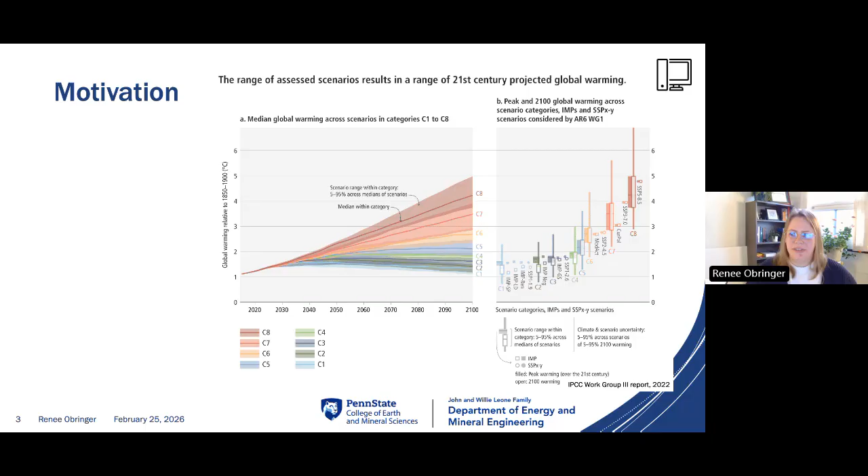This talk focuses on water, specifically water in the West, and some of the implications we've already begun to see from climate change. We're seeing increased droughts, a phenomena that's happened in the Western US for centuries. It is a drier climate, and so they end up with droughts.

But we've also started to see these droughts in places that haven't previously had extreme water issues, such as New York City and New Jersey, even leading to mandated water reductions on the East Coast, which was previously basically unheard of. To the point where after Hurricane Helene a few years ago, every state except two were actually considered to be in drought within the US.

Where I'm from in Pennsylvania, we tend to think of drought as a Western US problem, or somewhere away from where we are, because we generally have wet springs and summers. But that's starting to change, and we're starting to see this idea of demand management popping up in places it hasn't in the past.

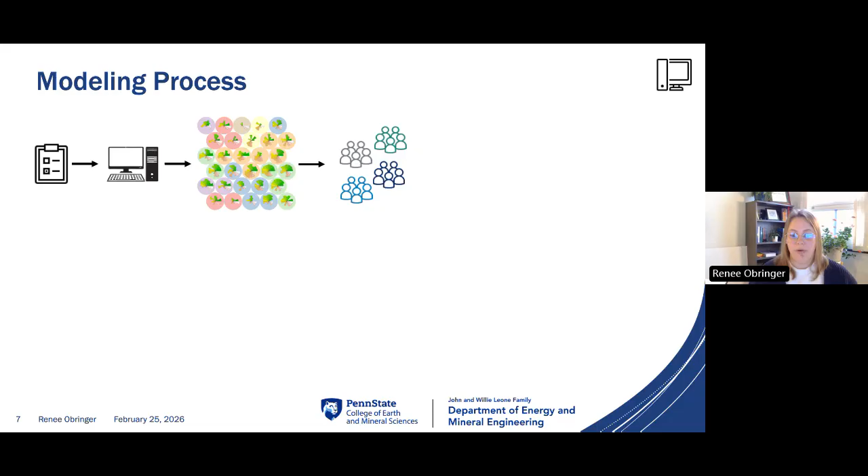We were able to classify those and ultimately ended up with 7 key archetypes of how people in these cities felt about water conservation. This first part was published in Water Resources Management in 2023, and it's the starting point of understanding these attitudes towards conservation.

After that, we took those attitudes and integrated them into the agent-based model. To do that, we collected stream flow data, weather data, and water consumption data from the 3 cities, integrated them into a large agent-based model, which is open access if people are interested. The result of this model is then a prediction of the water storage in the city as a function of these inputs.

Basically just solving the water balance equation: we've got precipitation coming in, we've got stream flow coming in, we've got water use leaving the system, we've got evaporation leaving the system. This initial development was published in 2024 and focused primarily on Phoenix, as just a way to test if we could integrate all of these data sources to adequately model the storage in the region.

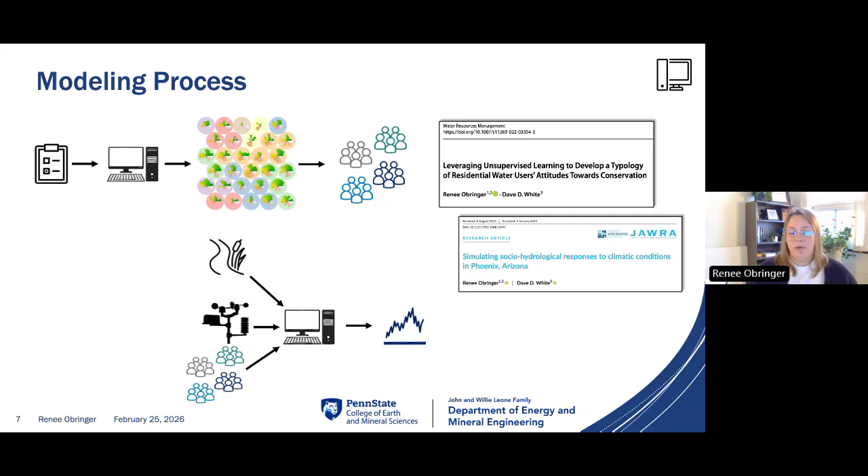What I'm going to talk about most today is the step where we actually integrated demand management and climate change into this model. To do this, we took away the observed water use and put in some hypothetical demand management scenarios based on our archetypes - basically saying, if we develop a more participatory water use model in Phoenix, Las Vegas, or Denver, if more people are participating in conservation programs and aligning themselves with a pro-conservation attitude, does that actually have a long-term effect on the storage?

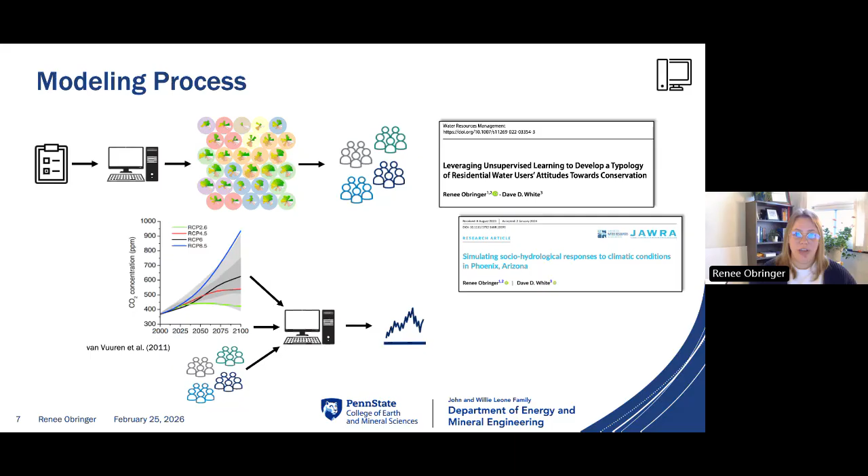We also took away our observations and replaced those with climate change scenarios, specifically using the CMIP5 scenarios, which had the greatest data availability for our region of interest. This most recent paper was published late last year in Water Resources Research.

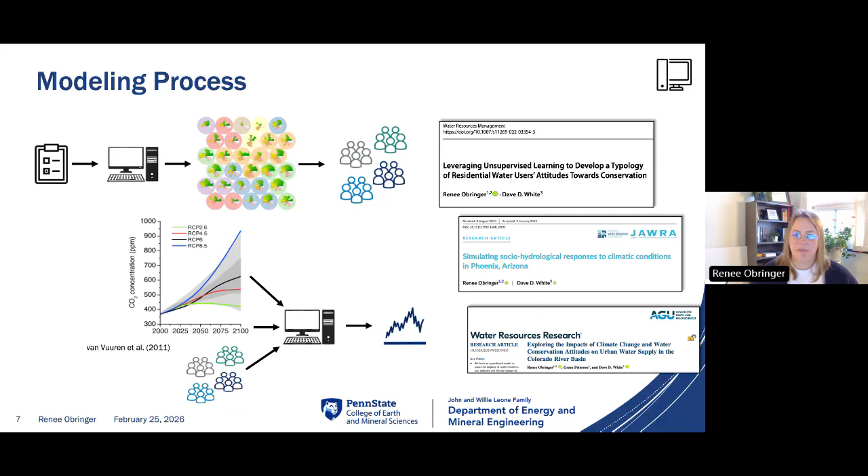Throughout the talk, I'm going to start talking briefly about these attitudes just to provide the background, but mostly I'm going to focus on this later ABM.

To jump into the research questions, the first question that we wanted to answer in that first paper is: what are the archetypes of consumer attitudes towards conservation? Is there a difference between somebody who is actively participating in a conservation program put on by their city versus somebody who doesn't care about water conservation?

Can we tell that there is a difference in how they responded to our survey? So in this case, this is that first half of the modeling process where we took survey data and developed through unsupervised learning to identify archetypes.

The primary input to this part of the study was the survey data conducted in 2018. There were 3,000 surveys sent through mail across the 3 cities with a 28% response rate. If you're familiar with social science work, this is pretty standard. You don't expect a very high response rate since people are busy and not always interested in filling out these surveys.

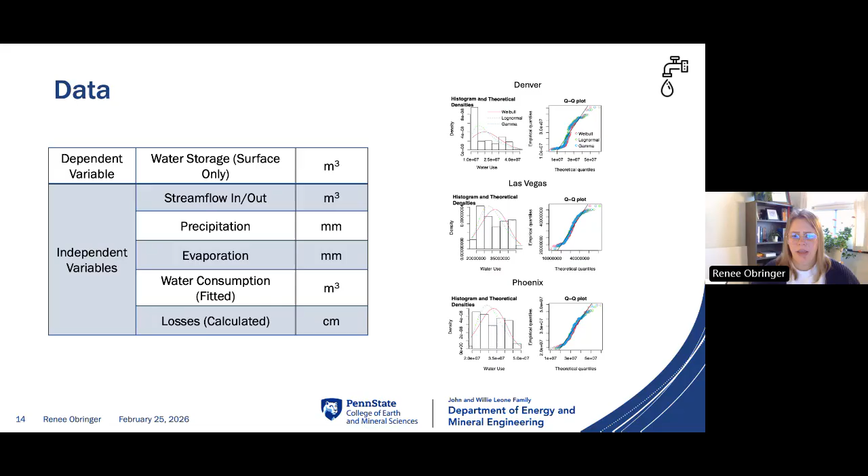And so here, our research goal was then to develop that ABM. And as a reminder of what our methods looked like, we took our stream flow in and out, our hydrological conditions.

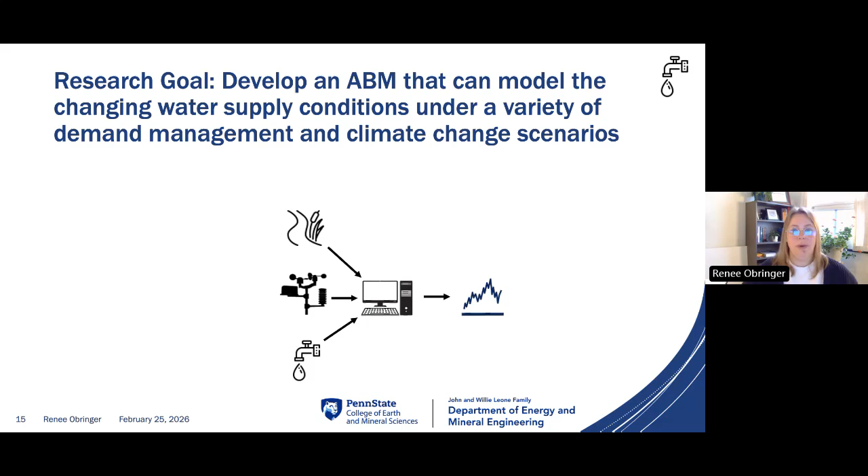our meteorological conditions in the region, and our fitted water consumption, built an ABM, got a prediction of the storage by solving that water balance, and then replaced it with demand management scenarios, primarily focused on changing those attitude archetypes, and also with climate change.

And again, in this case, we focused on an ensemble of 4 GCMs, but also did all 4 RCPs in the CMIP-5 iteration of the general circulation models. So we've got very low warming, very high warming, and the stuff in the middle.

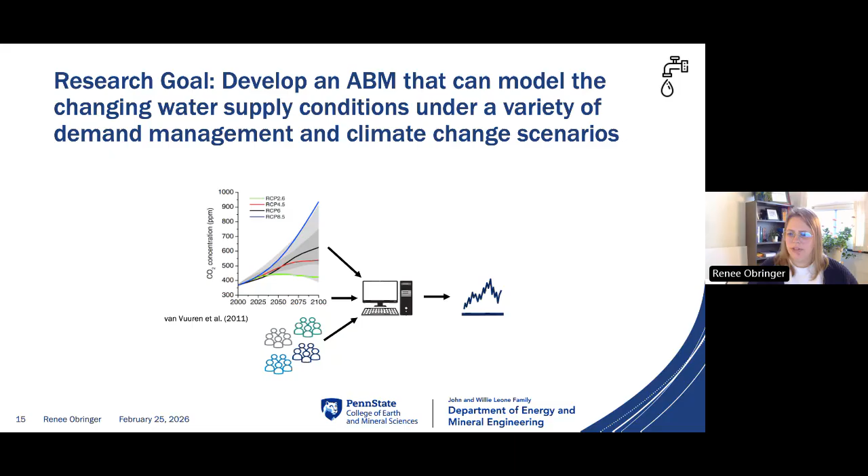And so to jump into the results, we have our observed baseline. When we started this model, we had all the observations, and we wanted to see how well the model actually fit the real data.

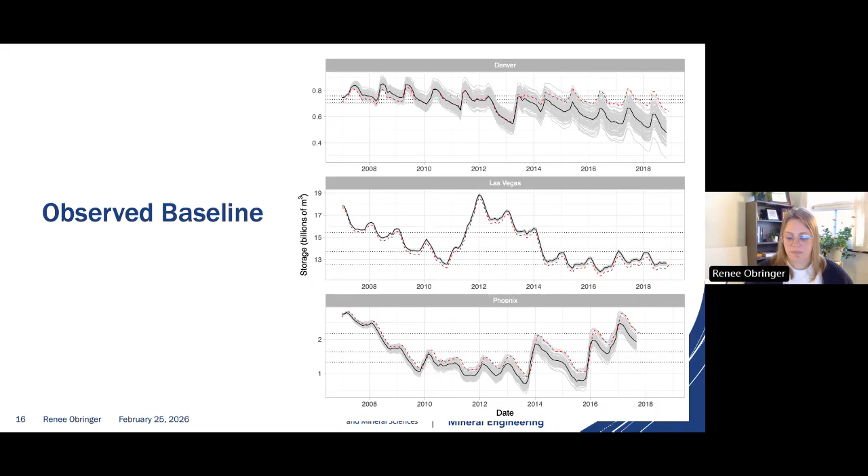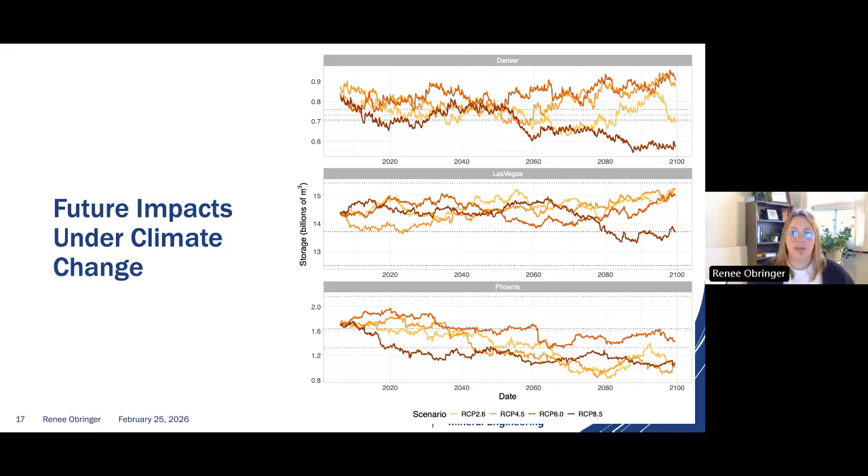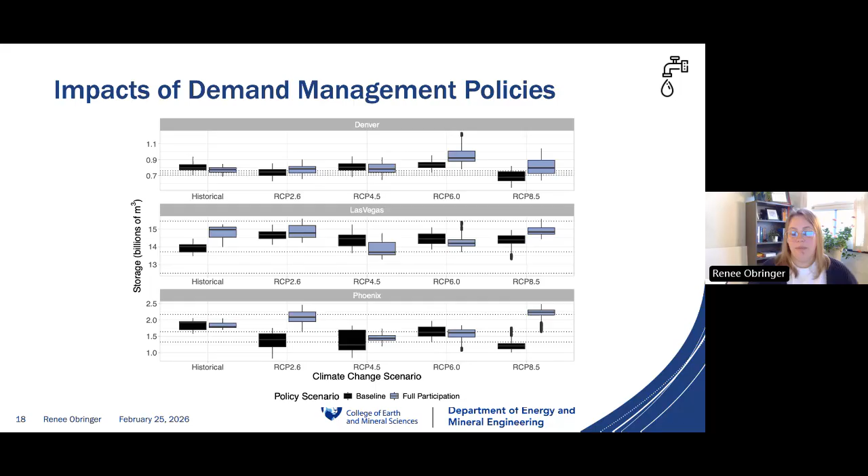In the lower basin, adding more participation is good and helps maintain some stability in water availability compared to the baseline, but it might not be a catch-all improvement. They might need to think about more creative solutions to manage the difficulty of climate change reducing water availability, when demand management alone isn't enough to keep up.

So to summarize, we found with our first paper that promoting these conservation attitudes can lead to improved water availability, but under extreme or even moderate climate change, these reductions are not always enough. Even though it is good to reduce our demand, we can't solely rely on that to solve the water availability problems that we have.

Certain climate realizations through our climate modeling can lead to reductions in surface water availability that can potentially outpace the improvements from reducing demand. So we might still end up in a situation where we're consistently in a water shortage, even though we've tried to reduce demand as much as we can.

So some practical implications, especially for the Colorado River, which is currently undergoing a renegotiation of the allocations for all the states and countries—Mexico is also involved in that discussion about who gets allocated how much water. It's a very complex legal situation, but one practical implication we can think about as we go through these discussions is that demand reduction is still important.

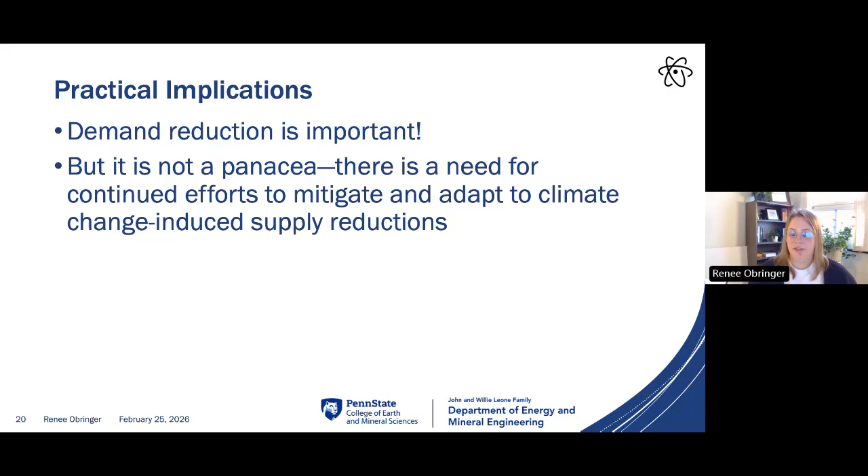There's still a need for continued efforts to not only mitigate climate change and reduce those potential impacts, but also adapt to these climate-induced supply reductions—either through increased water reuse or improved interstate and inter-country relations—to try to ensure that water is passing all the way through the river and that everybody has access to enough for a sustainable future.

It's also important to remember that not all climate change realizations will have the same impact. We had four models, and for each we took the ensemble, but each of those iterations makes a different projection based on its internal assumptions. So making sure we recognize that some climate models may have a fairer outlook than others, but acknowledging that these are, at their core, still projections, and that we need to acknowledge the uncertainty in those as well.

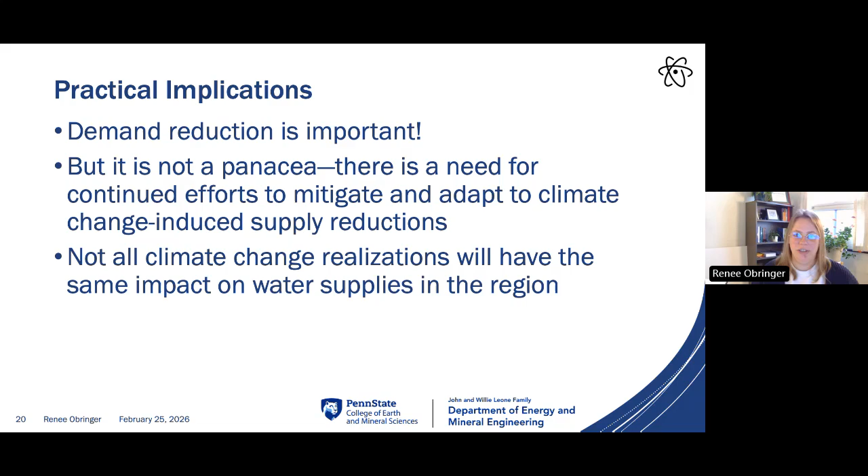Finally, cross-boundary coordination is really critical for maintaining the supply. Denver has the potential to see significant improvements due to demand management. But if they enact this, they also need to work with the cities and utilities in the lower basin to make sure Denver isn't just pulling their full allocation and saving it for later at the expense of Las Vegas, Phoenix, and Mexico down the line. So really encouraging cross-boundary coordination, in acknowledgement that some cities might win while others might lose, and we can work together to make sure everybody has enough water.

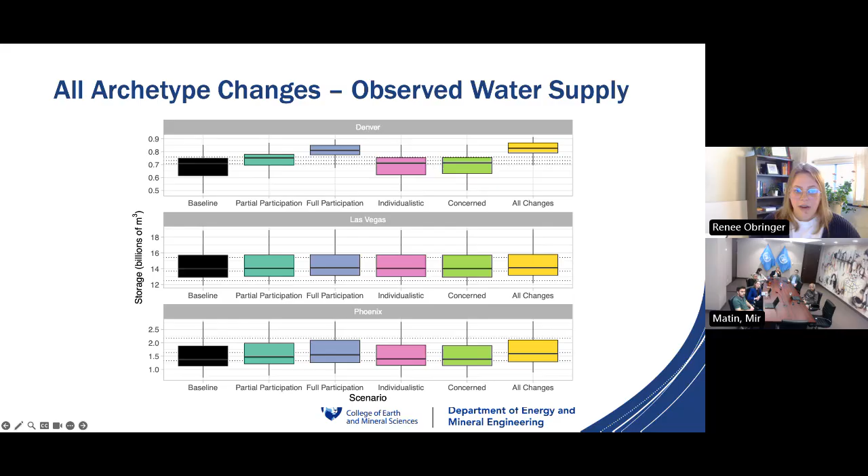Yeah, I think the archetypes might actually be somewhat transferable. I think I can actually pull up the survey questions. We really did try to make them somewhat transferable and not specific to the basin. The questions themselves were very general, basically asking to what extent would you support working with local managers, so being more participatory. I think that in terms of other water basins, these archetypes could be transferable, though we would probably see a lot more variation in them.

So if I was to pull this up—I'm in the Susquehanna River Basin, which flows into the Chesapeake. If I were to guess, we would potentially have a decent amount of would-be participants, but very few people actively participating, and we might have a lot more disengaged people that didn't fit the demographics of what we see out west.

I would guess that we would have a lot more affluent homeowners who are also disengaged in issues surrounding water in this area because we don't experience droughts very frequently. And when they do happen, we're actually currently in a drought warning, I think, right now. We did just get some snow, so it's sort of weird.